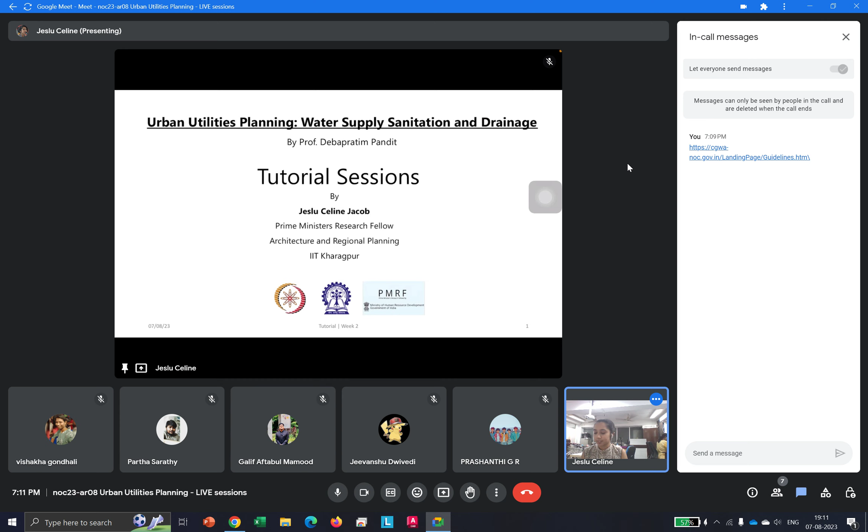So this week we will look into the topics which we discussed. We looked at water demand prediction and management, where we saw how we can predict water demand. Then in the next lecture we saw the types of water demand - what it's being used for, like fire demand, drinking, domestic water supply. So for all these elements we saw the different types of water demand.

Then in the lecture after that, we saw what causes fluctuations in water demand - the spatial and temporal factors which cause these fluctuations.

And in the later lecture we saw the role of government - how water is supplied, who monitors it, what are the state responsibilities, what are the center responsibilities, and are there any local bodies which regulate water. So all these roles of government we saw.

And finally in the last one we looked into the costs - is there a fixed cost, indirect cost, direct cost, maintenance cost. Then we also saw how we set tariffs - is it a flat tariff, a block tariff, or a volumetric tariff. So all these aspects we saw in our last lecture.

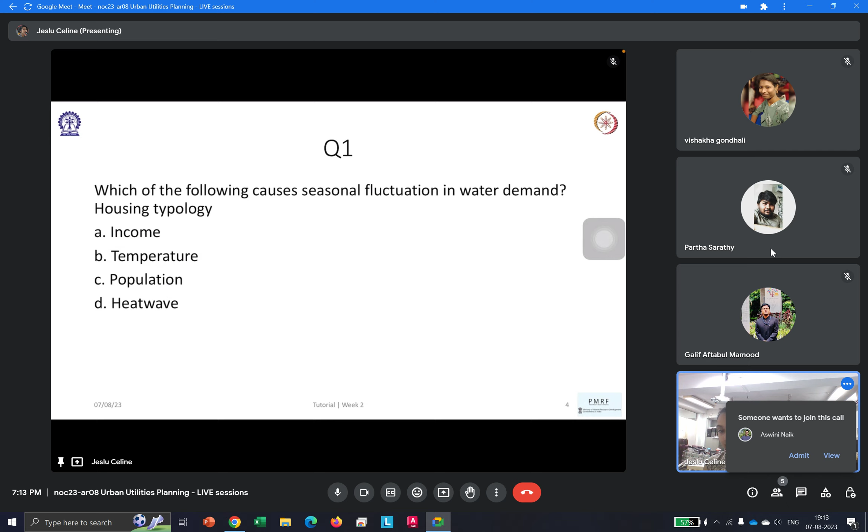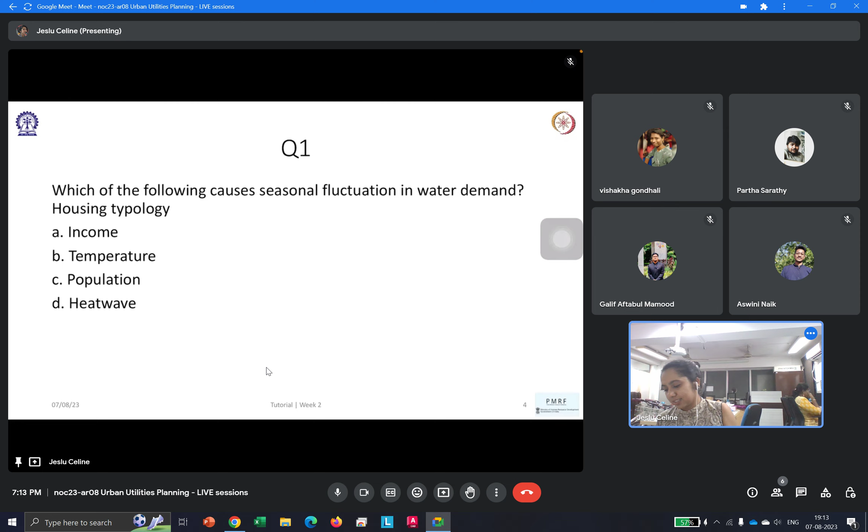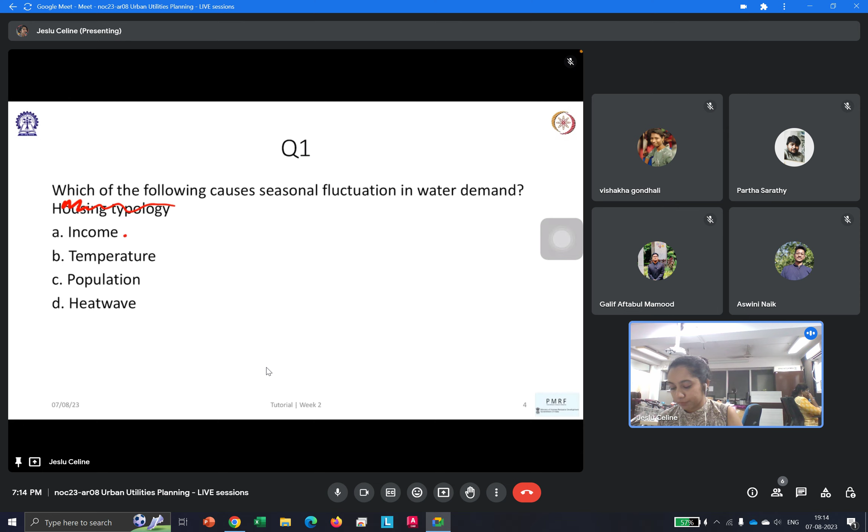So the first question is, which of the following causes seasonal fluctuation in water demand? I think we can just omit the first one, the housing typology one - that was supposed to be an option, but let's omit that, I think I made a mistake. So the options are income, temperature, population, and heat wave.

We are talking about seasonal fluctuation. So firstly, why do you think there are fluctuations in water demand? Seasonal fluctuation is one reason, yes. What are the other fluctuations that can be there? It could be due to the water usage behavior of persons, and there could be high temperature heat waves. Right, so there are many factors, like behavioral factors.

Seasonal comes under environment factors because of variations in environment. Then it can also be based on within a day itself - like you can have different usage based on peak time, needing water for a certain period, so there can be fluctuations in peak time, again linked to the behavior or activity of the person. Then also based on population - if there's suddenly a population growth or spatial variation in the region where water is being used, there can be fluctuation in demand. Even household type - different levels of housing, like if it's an affluent society you might use more water, whereas if people cannot afford a lot of water they may use less, based on the economic value of the place. So there are so many factors causing fluctuations in water demand.

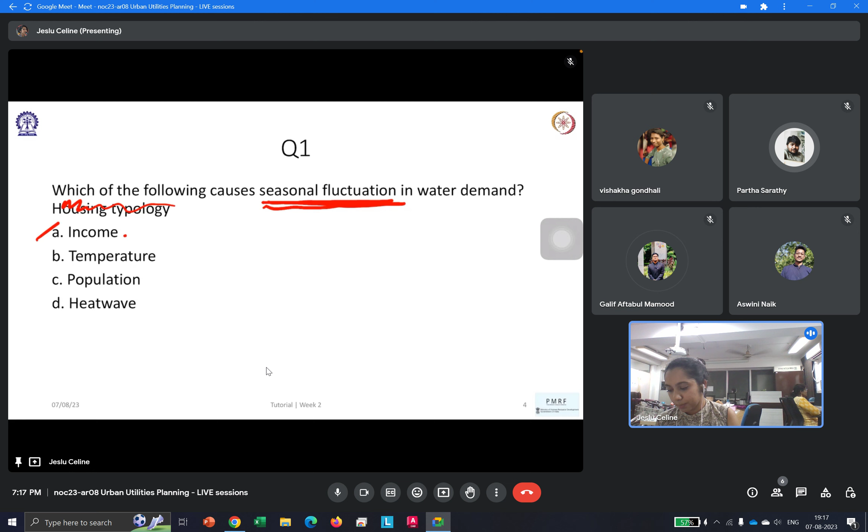So let's go back to the options and see which of these is a temporal variation. So income - is it a temporal variation or a spatial variation? Spatial, yeah, it is spatial. Income is a spatial variation, but with time also, the income of the family can change, so it can be included in both. If you can see the slide, it is included under temporal variation because over the years, the income of the family can also change.

One sec, somebody has joined. Yeah, because of this, the water usage behavior may also change. But when we're talking about seasonal fluctuation, income will not be part of it because with season, we can't say that every year at this particular season, the income's going to change. It's not going to change, so income is not the answer here.

Temperature - will that change with season? It's not changing... yeah, it changes with season and it causes seasonal variation. So the question mainly asks us what causes seasonal variation. So yes, temperature causes seasonal fluctuation.

And population - will it cause seasonal fluctuation? No, population will not. Population again is a spatial factor, and it cannot change with seasons. The population is not going to change, so that's not the answer.

And the last one, heat wave - does it cause a seasonal fluctuation? Yes... okay, anybody feels it doesn't cause a seasonal fluctuation? It lasts for maybe 2-3 days, 1 week, so it causes immediate fluctuation, I think. Correct, exactly, so we cannot claim that heat wave causes a seasonal variation.

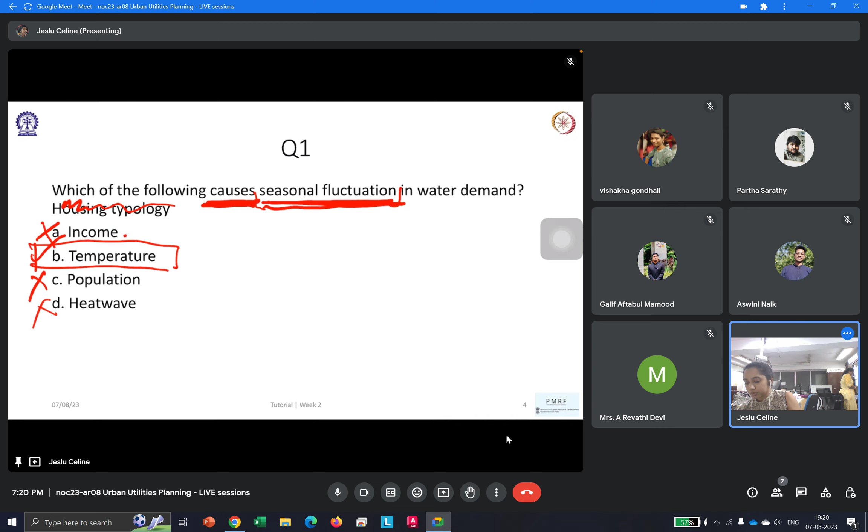So yeah, this is a tricky part. It might look like heat wave can cause seasonal fluctuation, but it doesn't, because we are talking about the main definition of something which recurs every year. So coming back, heat wave cannot. The answer is temperature - temperature causes seasonal fluctuation in water demand. So, any doubts in this question?

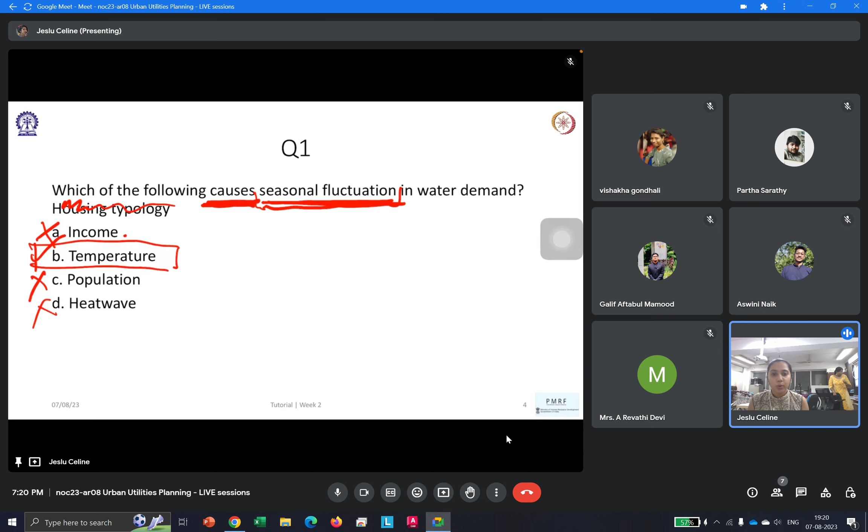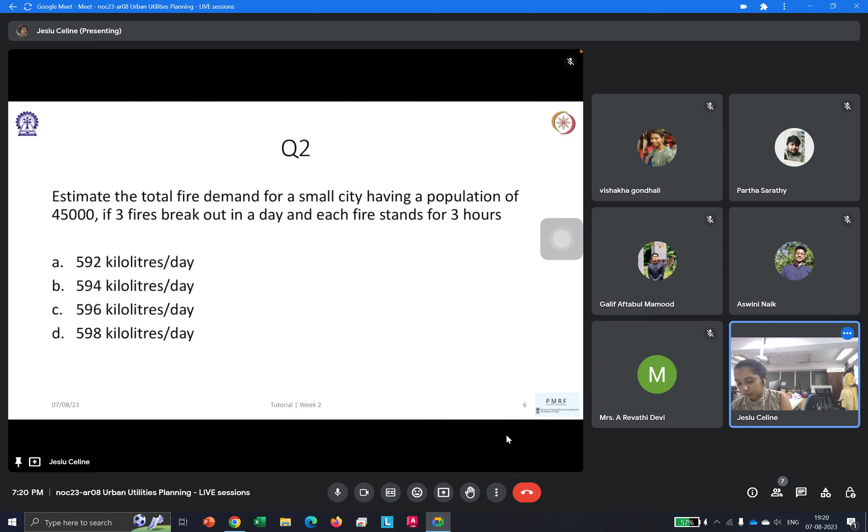Okay, very good, so let's proceed to the next question - this is a numerical. I would suggest all of you take your calculators and we'll work it out together. The question asks: estimate the total fire demand for a small city having a population of 45,000, if three fires break out in a day and each fire lasts for 3 hours. So we've been asked to find the total fire demand - this is what we need to find.

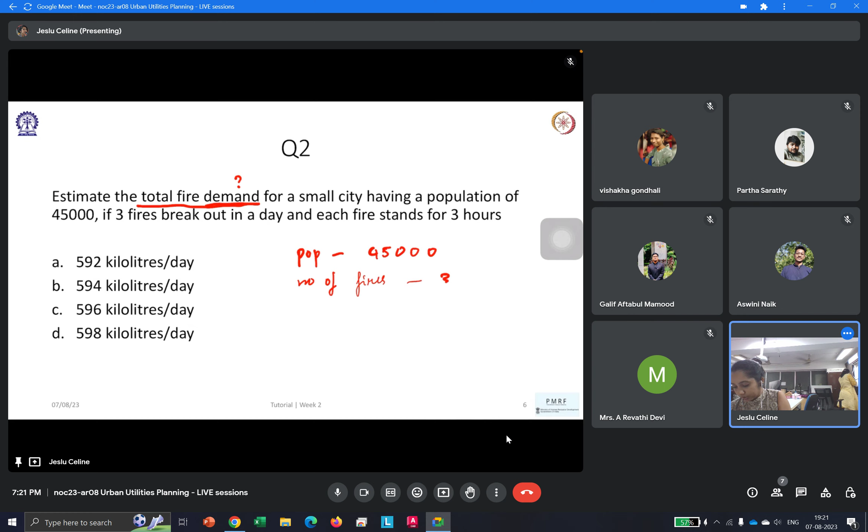And we know - I'm just writing down whatever we know. So we know the population is 45,000, and we know that the number of fires is three, breaking out in one day, and the duration of each fire is also known - that's the information given to us.

So now, how do we find fire demand? I'm sure all of you have gone through the video lectures. So we learned three methods of estimating fire demand. Can somebody give out any of the methods which you remember?

Okay, so what is the significance of population? Based on the population, the number of people residing in a place, the formula we use to calculate the fire demand also varies.

We have learned three methods. The first method is that if the population is less than 50,000, we use this where Q equals the number of fires into the discharge in minutes into the duration, divided by the total population. This gives us the water demand in liters per capita per day.

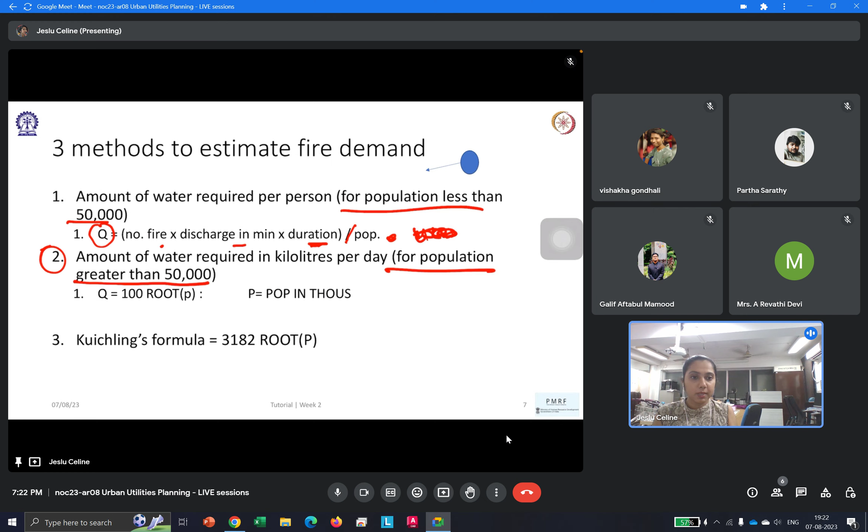The second one is that if the population is more than 50,000, we directly go by this formula because the quantity is large. We can estimate it since it's for a larger group, and more diversity is allowed. So we use a blanket formula where Q equals 100 root P, where P is the population in thousands. The last one is Kuichling's formula, where we use 3182 root P. These are the three methods we discussed in lectures to estimate fire demand.

So over here, which method would be suitable? Method one is suitable, yes. Why? Because the population is less than... Population is 45,000, which is less than 50,000.

Now if it equals 50,000 also, we can go by the first one. In fact, if we go by the first one, it'll always be correct. But to reduce complexity, since here we only need the population and not the discharge or number of fires or duration, we use the second formula when we have limited information. So we'll go by the first formula.

So let's see if we are writing the first formula. Let's do this together. Q will be equal to the number of fires into the discharge rate. The discharge is in minutes, and we multiply it by the time in minutes, which is the duration. So duration is again in minutes, and this whole thing, if we want to find it per person, we divide by the total population.

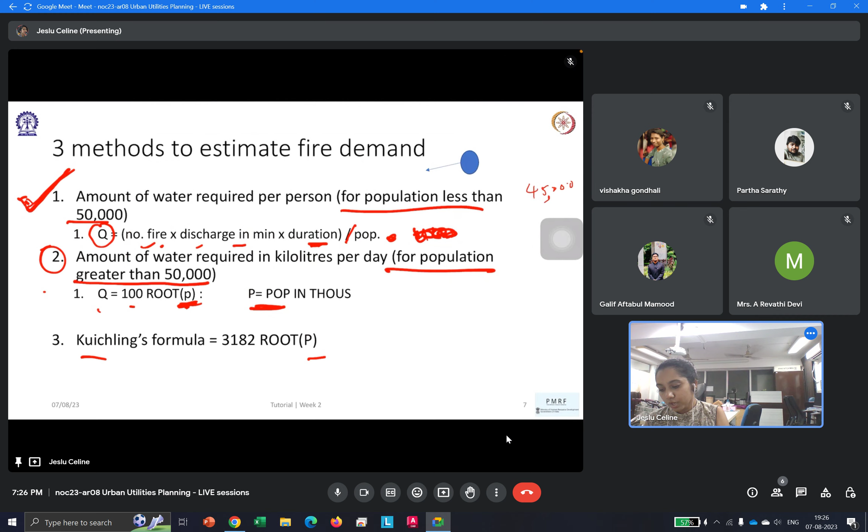And divided by the total population of 4,500. I'm not going to solve this right now, let this be. So now if you look at the options, this one gives us per capita demand - what is the fire demand per person. But in the question it's just given as kiloliters per day, which means we don't have to find it per person. So whatever value we get, we eventually need to convert it to kiloliters per day.

This is what we need to convert it to, or let's say liters per day. This is going to give us LPCD - liters per capita per day. This is the unit we are going to get from this. So to convert this, if we are removing the per capita, we need to multiply by the population. So it'll eventually be 3 into 1,100 into 3 into 60 divided by 4,500 into 4,500. This will get cancelled out. So now we can solve this - how much does this work out to?

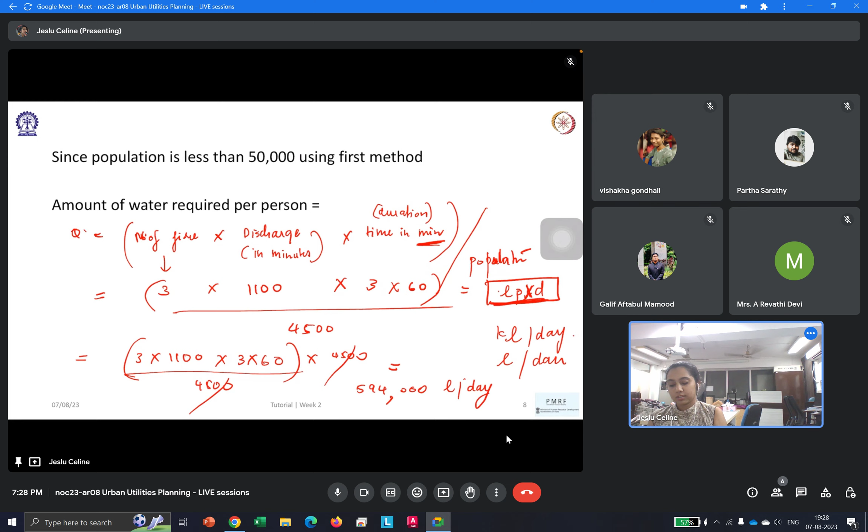How much does that work out to? 5,94,000 - yeah, that will be 594,000 liters per day. So the question is in kiloliters per day, so it will be 594. That's there in our option B if we look - yeah, it's 594 kiloliters per day. That's the answer. Any doubts in this question?

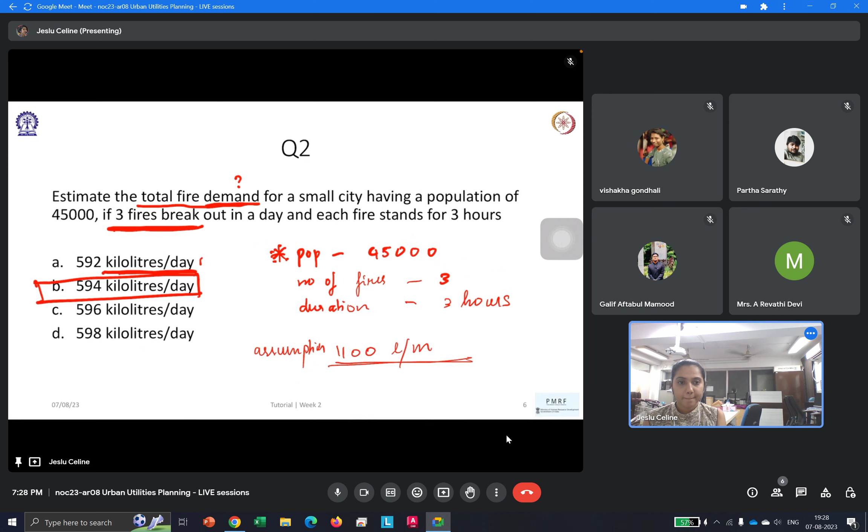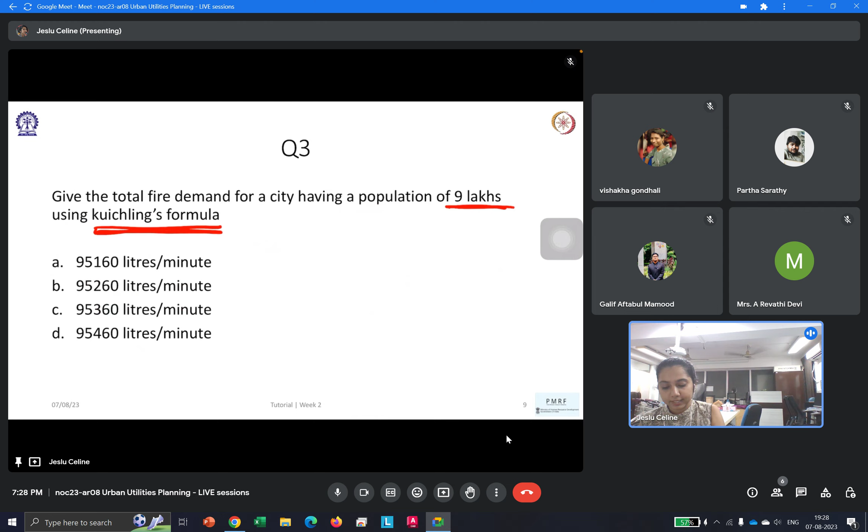Okay, so let's proceed to the next question. This is also a numerical, a very simple numerical. It says: give the total fire demand for a city having a population of 9 lakhs using Kuichling's formula. They've mentioned use Kuichling's formula, so it's a direct formula application. The population is given to be 9 lakhs, which is 9 into 10 raised to 5.

Now what was Kuichling's formula? Q is equal to 3182 root P. So if I write it as 3182 root of 9 into 10 raised to 5, is this correct? Is that the right method?

Okay, one factor we need to consider here - yes, somebody was saying something. Population, we have to check whether it was in thousands or lakhs. Correct, yeah, you're absolutely right, very good. So if you have to use Kuichling's formula, the population should be in thousands - that is the only requirement. Like the previous formula where we said time should be in minutes, here the population should be in thousands. These are all empirical formulas, right? So if the unit changes, or if the factor we're taking changes, then we'll get a wrong answer.

So it should be in thousands. Here it's given in lakhs, so now we have converted it, but for every 1,000 population we need to divide it by 10 raised to 3 in order to make the population into thousands. And then if we apply, we will get the correct answer. So this will be - yeah, this and this will cancel, it should be 900. Let me just put in 900. So what does this work out to?

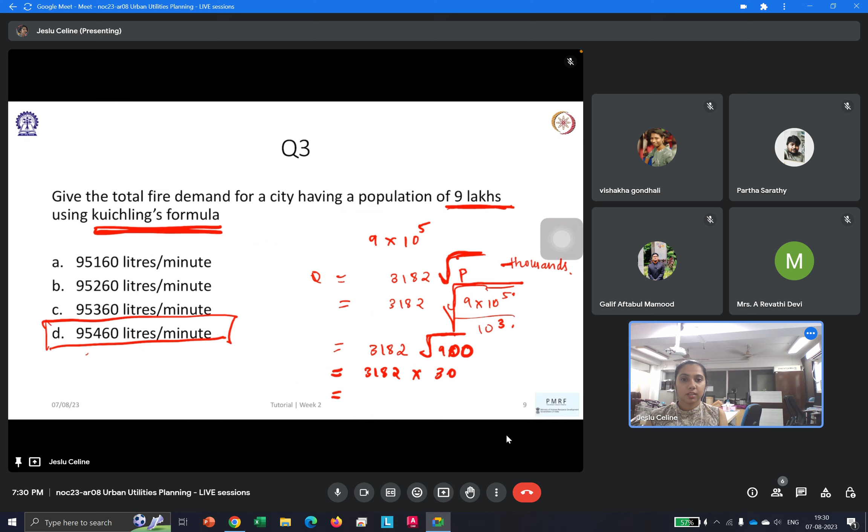95460, yeah, so that is there as option D, right? Yeah, 95460 liters per minute. Okay, any doubts in this question, anybody? Yes, let's proceed - so yeah, that was that.

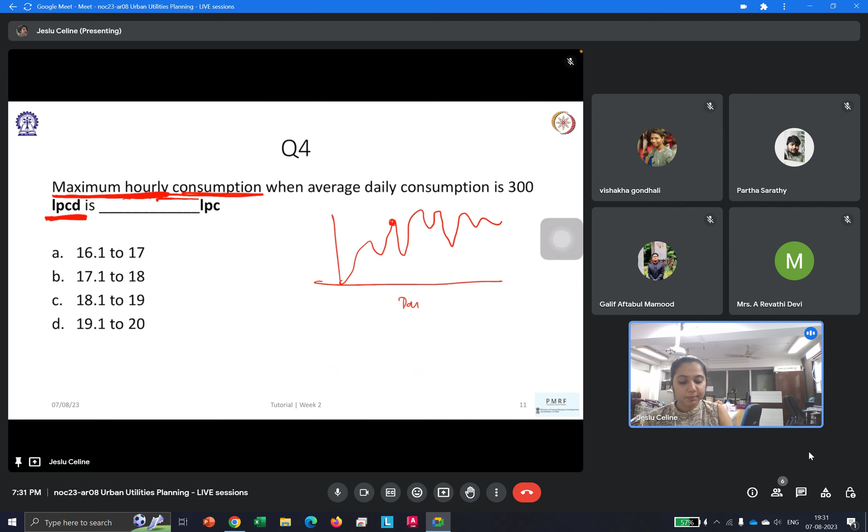So we have learned certain things - before we go into that, why do you think there is a maximum hourly consumption, or why do you think for every hour there is a variation or fluctuation? We just discussed that - there can be several factors leading to it. It can be a habitual factor, climatic factor, there can be seasonal variations. So based on that, if you take a time within a day itself, in an hour there can be certain peaks and certain lows. For instance, at morning 8 a.m. to 9 a.m. there can be a peak because people are going out or getting ready to go out, and then again in the evening it drops.

In the evening there's again a peak because people are coming back and using water in the evening time. Based on this, we see that for every hour there can be a variation, and we've derived certain general factors which we multiply with the average consumption to find the peak values. So does somebody remember, if you want to convert the average annual consumption into maximum daily consumption, what's the factor we use? It's how many times - so maximum daily consumption is how many times the average annual consumption?

2.7 or 1.8? Okay, you're partially right, so let's go into that - it's good to remember this. Maximum daily consumption is around 1.8 times, or 180 percent of the average annual consumption. This is something given in LPCD, which will come into the maximum daily as 180 percent of the average annual consumption. And the maximum hourly consumption, which is our LPC, is around 1.5 times, or 150 percent of the average daily consumption.

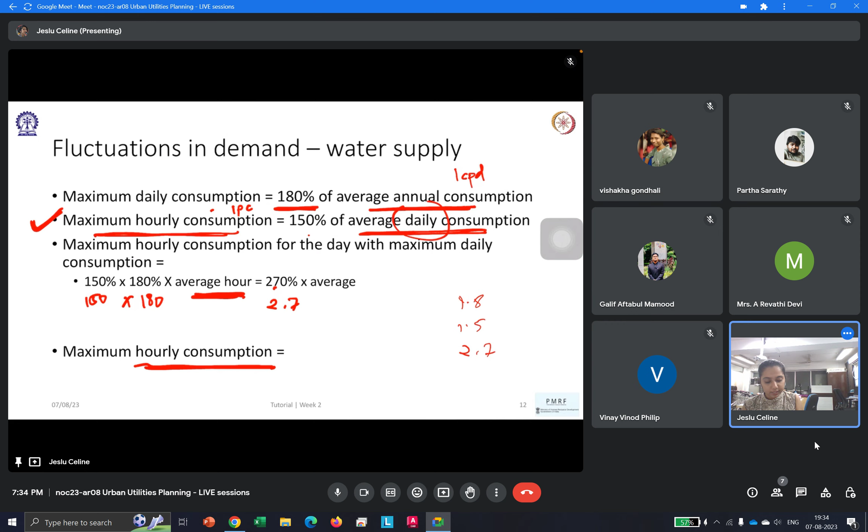So here the question asks what is the maximum hourly consumption, which means we are going with the maximum hourly consumption given the average daily consumption. Let's see what is given - yeah, we are directly given the average daily consumption, so it's a direct formula application. We can say the maximum hourly consumption would be around 150 percent - one thing we need to look into is that the average daily consumption is given in liters per capita per day.

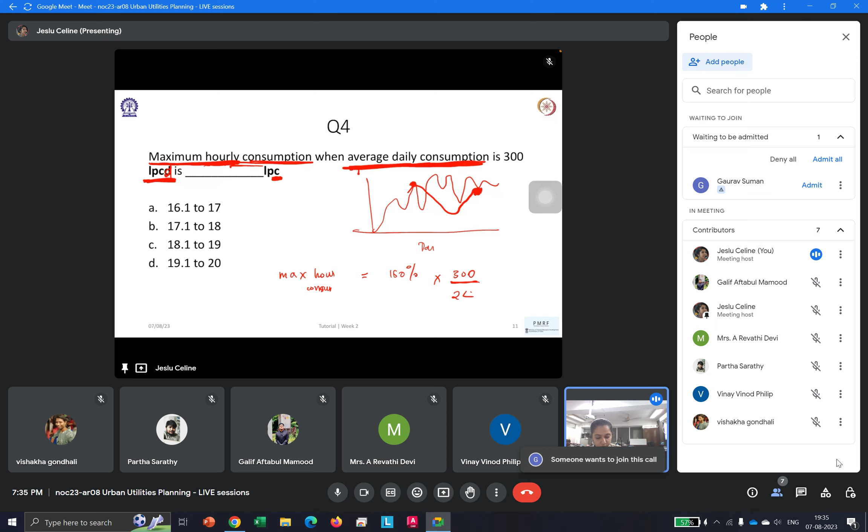So liters per capita per day is given, and here we need only maximum hourly, which is per capita, so we divide this by 24. This is something we might forget to do. Whatever we've got, we have to divide it because there are 24 hours. Right, so you have to divide it by 24. Let's do this calculation - this will be 1.5 into 300 by 24. How much does that work out to?

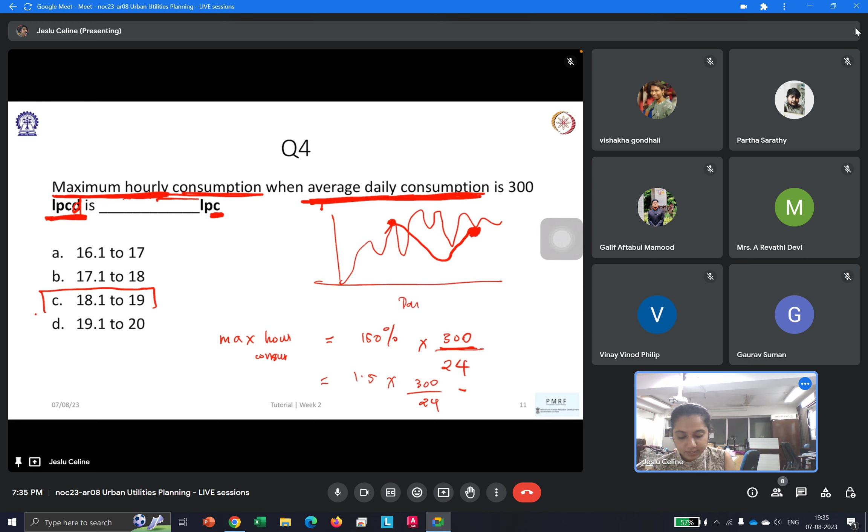How much does that work out to? It is 18.75, marks option C. Correct, 18.75. So here it's been given in a range, 18.1 to 19, so option C will be the correct answer. Any doubts in this question? Anybody?

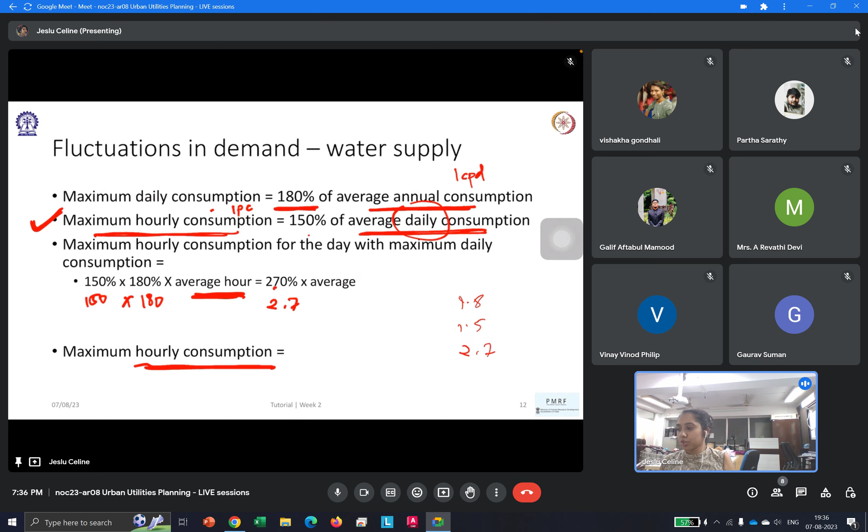Okay, great, so let's proceed to the next question. This is a continuation of the previous question - by continuation I mean it's very similar to the previous question, so the theory will be similar. The maximum hourly consumption of the day with maximum daily consumption, when average daily consumption is 200 LPCD, is dash LPC.

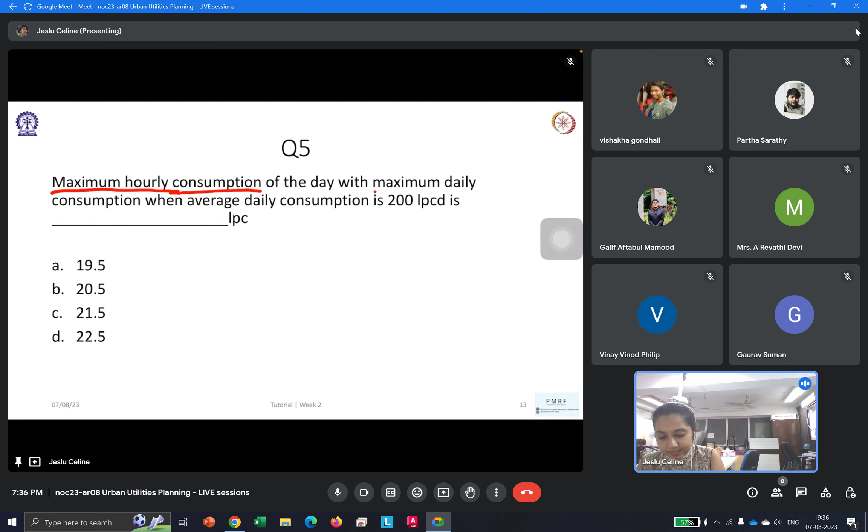I would suggest one of you tell me how we go about this question, since we've already discussed the theory, so it should be easy. Which formula would we use? What factor - do we use 1.8, 1.5, or 2.7? So what we've got, we have to find the maximum hourly consumption, and we have the maximum day. We have to find the maximum hourly consumption of the day with the maximum daily consumption - so it's the maximum hour of the maximum day when the average daily consumption is given. So what's the factor that we use?

2.7, correct, 2.7. Just to explain again - we use 1.8 to get the maximum daily consumption from the average consumption, and again we have to divide it by 24 because it's given for an entire day. To get the hourly peak, we multiply it again with 1.5, so this works out to 2.7. So it's 2.7 into 200 by 24. How much does that work out to?

22.5, very good. That is option D, 22.5. So any doubts in this question? No doubts. Very good, so we can proceed.

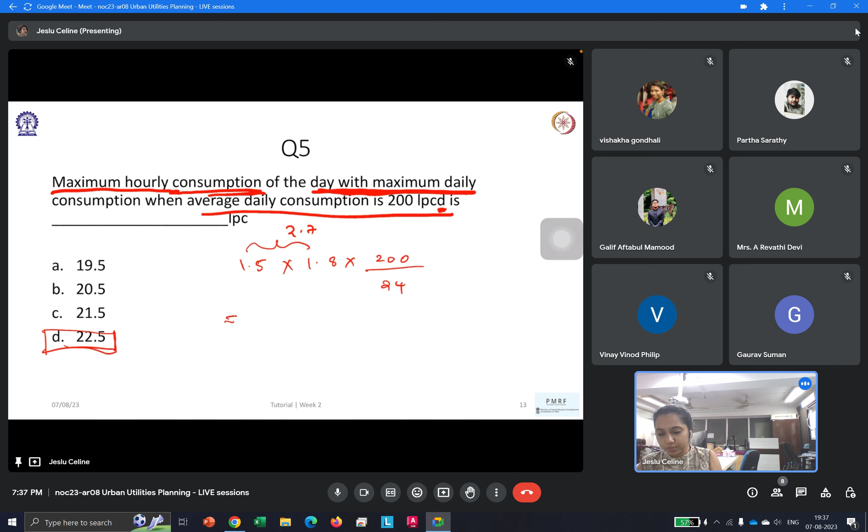That was a fairly simple question. Now we're going to question 6, which is again not very difficult. Identify the false statement concerning water supply. Four options are given. A: 24-hour supply decreases wastage of water due to leakage. B: there is constant pressure in the distribution system in 24-hour supply. C: maintenance requirement for joints and meters is comparatively more for 24-hour supply than intermittent supply. D: metering reduces water pressure drop.

This is regarding water supply, mainly talking about 24-hour supply versus intermittent supply. Let's start from the last option. Option D - is that right or wrong? Does metering reduce the water pressure drop? Any idea?

I think it is false. You think metering does not reduce water pressure drop, you feel it should be constant - metering does not affect the pressure drop, is what you're saying. Yes. Okay, anybody with a difference of opinion? Revathi, do you want to add something? No, no, it's okay.

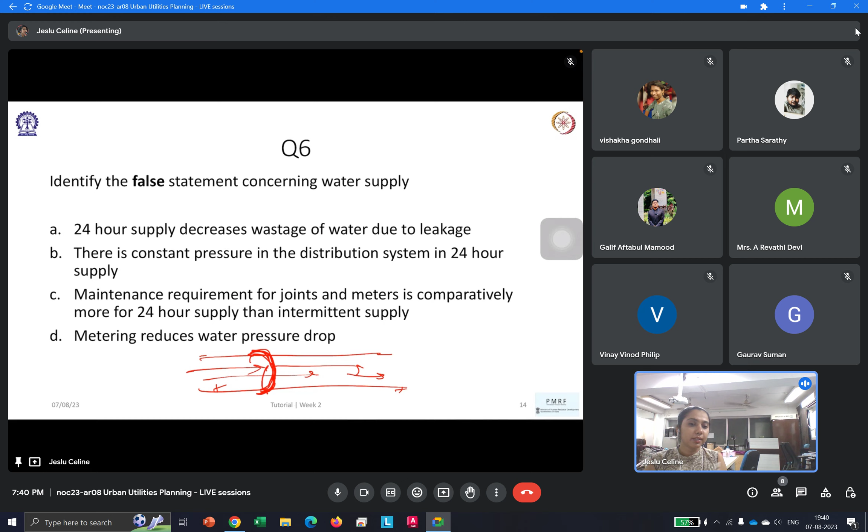I think this part, maybe in the lecture, we've not discussed in detail how metering affects water pressure. When there's 24-hour or continuous supply, there's continuous water flowing through, so there's constant pressure. Now what does metering do? We're introducing another element onto the pipeline - a meter. Because of this external element, there is an alteration in pressure drop. So when there's metering, there is a pressure drop - metering reduces water pressure drop. So that's actually a right statement. Maybe this we have not discussed in detail in the lecture, so that's why confusion is there. So that answer is actually right.

Now option C: maintenance required for joints and meters is comparatively more for a 24-hour supply than an intermittent supply. Is that right? Yeah, it is right, ma'am. Why is the statement right? Why do we need more maintenance? Because to ensure water is always there, we have to maintain it properly so that there is no leakage, no wastage. Correct, absolutely right. Maintenance is more, you need to maintain more when there's a 24-hour water supply.

Now let's go back to option B: there is constant pressure in the distribution system in 24-hour supply. Is that right? Correct, yes, because that's what we discussed - since there's always water flowing, there's constant pressure. And option A: 24-hour supply decreases wastage of water due to leakage - is that right? False, it's false. If there is a small leakage, then with 24-hour supply, water will just keep going, whereas with intermittent supply, only for that hour when water is pumped will there be leakage. So the false statement here is A, 24-hour water supply decreases wastage of water due to leakage.

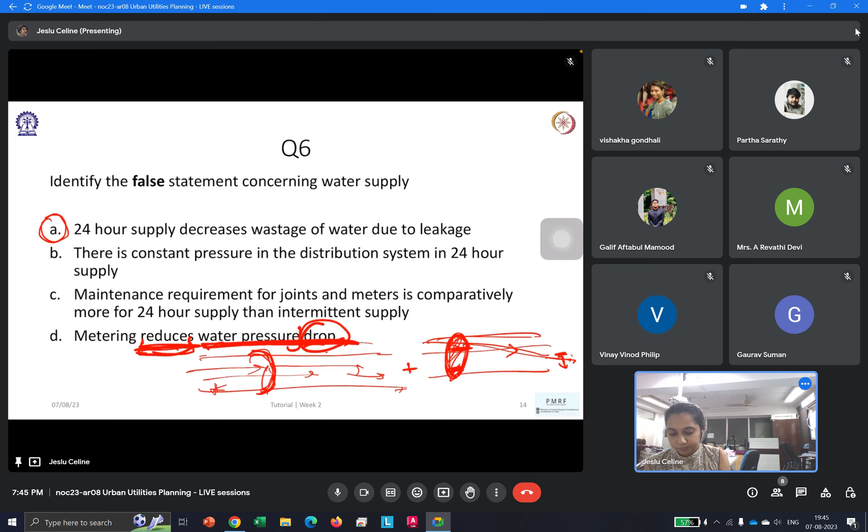So first we're talking about coincident draft. How do we calculate coincident draft? There are two methods. Coincident draft, or the total draft, the first one is that we take the sum of the maximum daily demand plus fire demand.

This is the first one, or we can go for the maximum hourly demand of the maximum day, using the 2.7 factor which we used for the maximum day. So these are the two methods, and we take the maximum of both, whichever is maximum: either the maximum daily demand plus the fire demand, or the maximum hourly demand for the maximum day.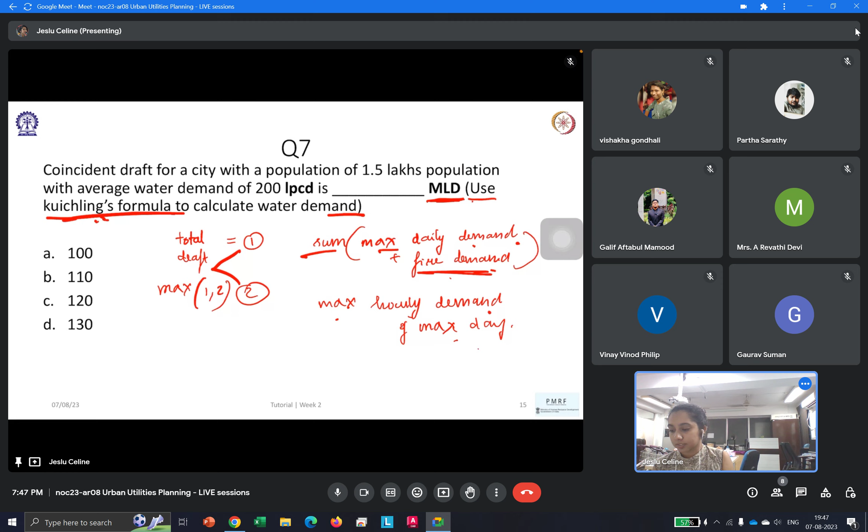So we will be using Kuichling's formula when calculating the fire demand. We would need it, so let's calculate both and see which one we need to take. In the first one, we need to find the maximum daily demand. So how do we find the maximum daily demand?

What is the - again, let's go back. The question gives us the average water demand as 200 LPCD and the population as 1.5 lakhs. Let's write that here first: population is 1.5 lakhs and average demand is 200 LPCD. So this is what is given. So, what will be the maximum daily demand?

Maximum daily demand - can somebody say what will be the expression for that? We just discussed this: 2.7 times average demand - no wait, we are only looking at the maximum daily demand, not the maximum hourly demand of the maximum day. We're just looking at the maximum daily demand, so what is the factor for that? It's not 2.7.

1.8, correct. So for maximum daily demand, it's 1.8 into - again this is given in LPCD, liters per capita per day. The question is asking us to find it in million liters per day, which means we have to get rid of the per capita, so we have to multiply it with the population.

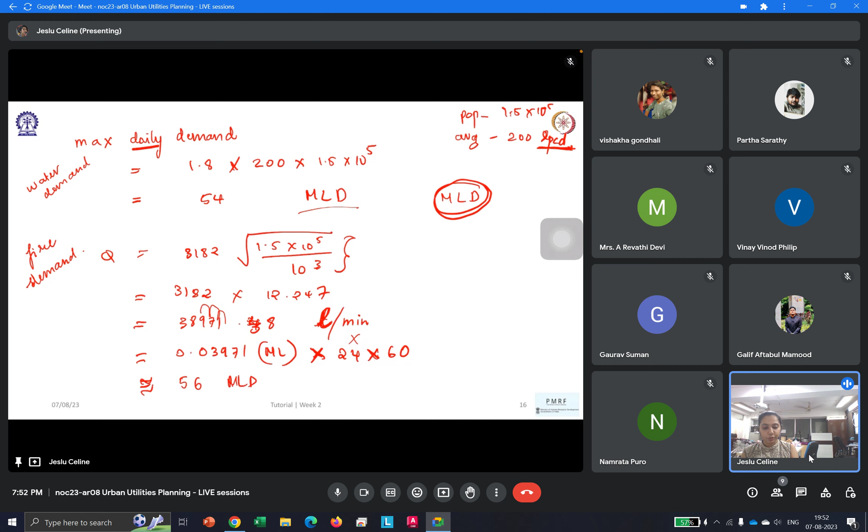So now let's go back to the formula. For the first formula, it should be the sum of maximum daily demand plus fire demand. So we are adding Q1 and Q2. Q1 plus Q2 is equal to 54 plus 56.

Right, so this is what we got from the first method. Now let's go to the second method, where we find the maximum hourly demand of the maximum day, like maximum daily demand. What's the factor for that? 1.8 into 1.5, 2.7. 2.7, correct. 2.7 into our 200 LPCD.

Now we have to convert it into the population. Because we want it in MLD, we are doing the same thing into 10 raised to 5. Now we also have to divide it by the number of hours, because this is for the maximum hour that we are looking forward to. So how much does this work out to?

Yeah, so one thing, sorry, we are doing this. This is the standard tendency that we have - we divide it by 24 in order to get it into the number of hours. But as we are saying we are looking at MLD per day, which means we did not do that. So eventually we'll again have to multiply it by 24. So let's not do that portion, because our unit is MLD.

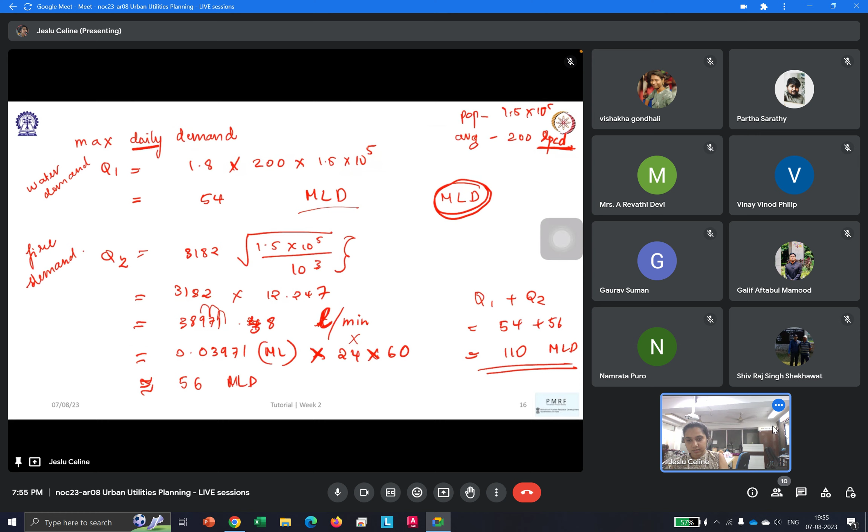Let's go back one sec. It's stuck. Yeah, so 110, option B, 110 is the answer. Any doubts in this question?

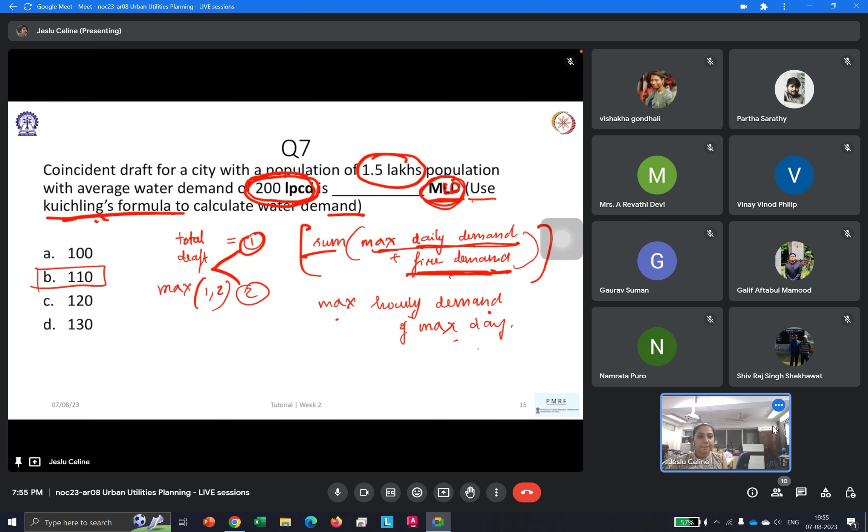Okay, so let's proceed further. Question 8: Water demand is mostly inelastic in terms of income, water price, household composition, or none of the above. Firstly, what do we mean by elasticity or inelasticity? Any observations on what you mean by inelasticity?

Doesn't vary with - that's the tendency of being flexible, yes, that's the normal definition. But as Galif said, it doesn't vary with. So in the aspect we're talking about here, we're talking about water demand being inelastic, which means...

Inelastic means, okay, so if we have a factor X contributing towards Y, and if Y is our water demand, now if X is changing, if X increases, and Y also changes, then it is elastic in terms of X, because whenever X is changing, Y is also changing. But even when X is changing, if Y does not change, then it is inelastic in terms of X. So that's what we want to find here.

If our water demand is Y, then for which of these factors is water demand or water consumption not changing? Let's go option by option.

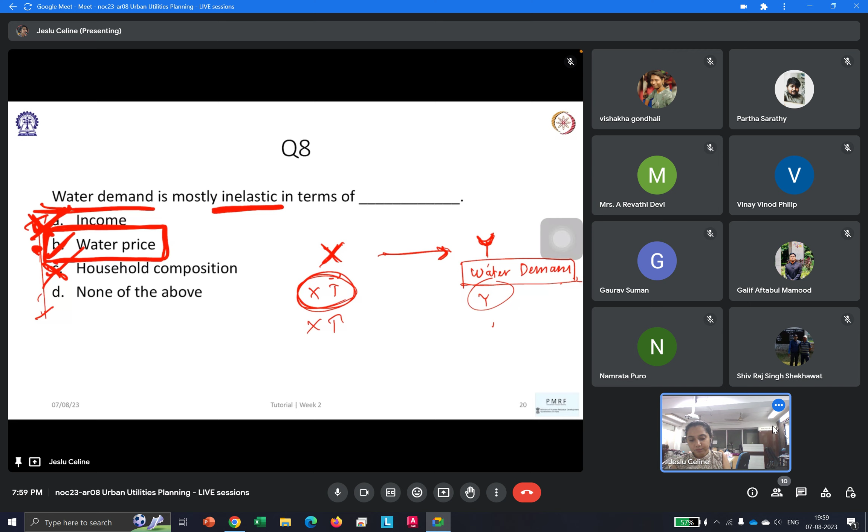Which of the following is not an example of macro scale interaction concerning water demand? Before we attempt this, let's look at what macro scale means, and what the other scale is that exists.

So what is it? Something which has an impact on a national level, yes. National level, or mainly at an environmental level - it's not very personal, but more for the community or the environment you're in, so at a larger scale.

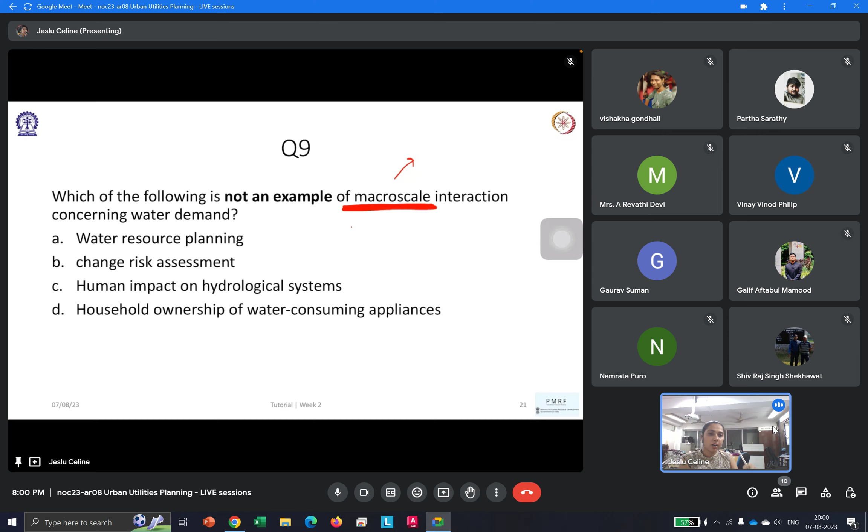So you have a macro scale, and along with that we also have a micro scale. Macro scale is at a larger regional, municipal, or community level, or as rightly said, at a national or global level - all that comes under macro scale. Then we have micro scale, which is at a very individual household or a very small level - by the name itself, it's a micro level.

So here we've been asked which of these is not an example of macro scale interaction. Let's look at the options. Water resource planning - is that macro or micro scale?

It is... a micro scale? Water resource planning, is it... macro. It's macro. Okay, why is it macro?

We can cite an example of, let's say, Ganga River. It passes through various states. And if one state is planning for some municipal project, water resource planning comes into play because every state has some share, some sort of share to which they are limited to use.

So just to pick out a few keywords from whatever you said. You said that every state has a responsibility, it goes through different states, there's a state government policy which is put. So all this shows there is an authority at a community, regional, municipal, or state level, with some responsibility or impact because of this planning. So all this resource planning, policies, or allocation comes under a macro scale because it doesn't consider only a single individual, but people or a population at large.

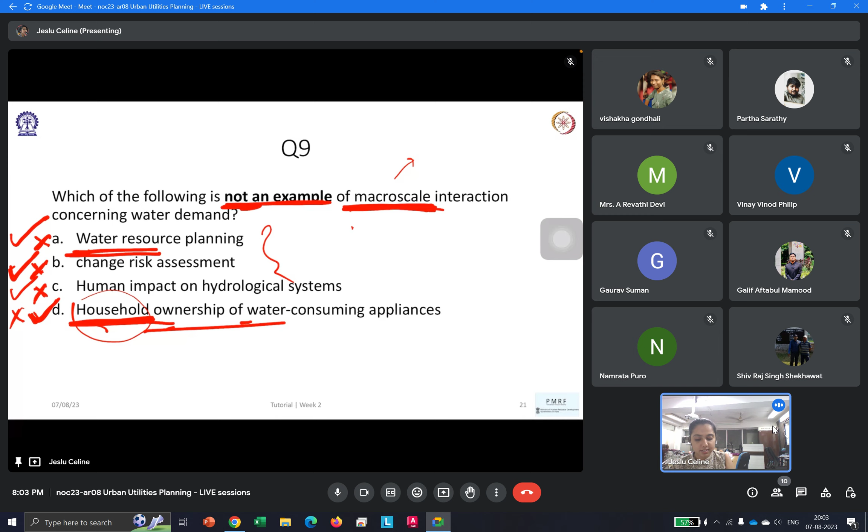So this is the correct answer, option D. Let's proceed on to the next question.

Question 10. According to IS 1172/1993, what is the minimum amount of water for economically weaker section of population considering supply through a stand post for communities with population up to 20,000? This is a direct IS application question.

Anybody have any guesses on what's the answer for this? 100. Okay, any more guesses? I can guess normally it's 60 LPCD. It's LPCD, it is 60. Okay, anybody else? Any other difference of opinion?

Okay, so let's look into the theory we learned for domestic water demand. So for communities with water supply through a stand post, as per IS 1172/1993, the minimum water supply should be 40 LPCD. Now, 100 is when the community has a population of up to 20,000... for a population greater than 20,000, up to 1 lakh, and with a full flushing system, it is 100 to 135 LPCD. Here the question specifically asks for a population of 20,000, so for 20,000 the minimum is 40.

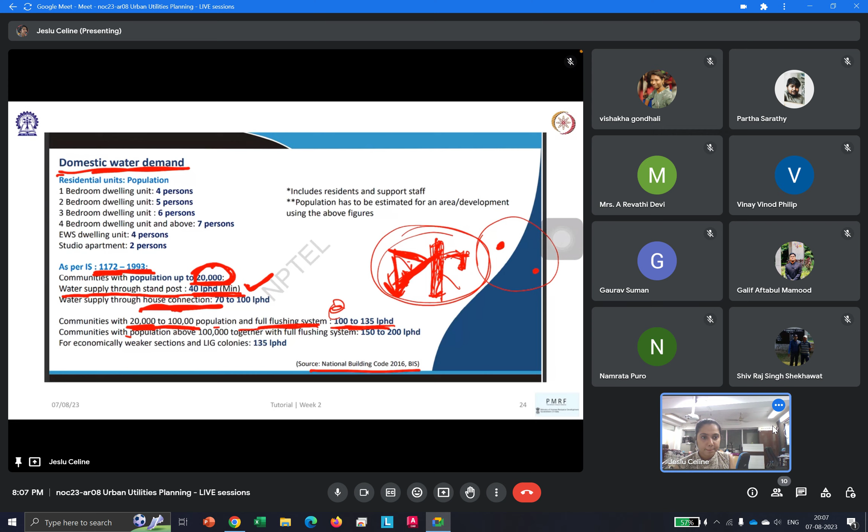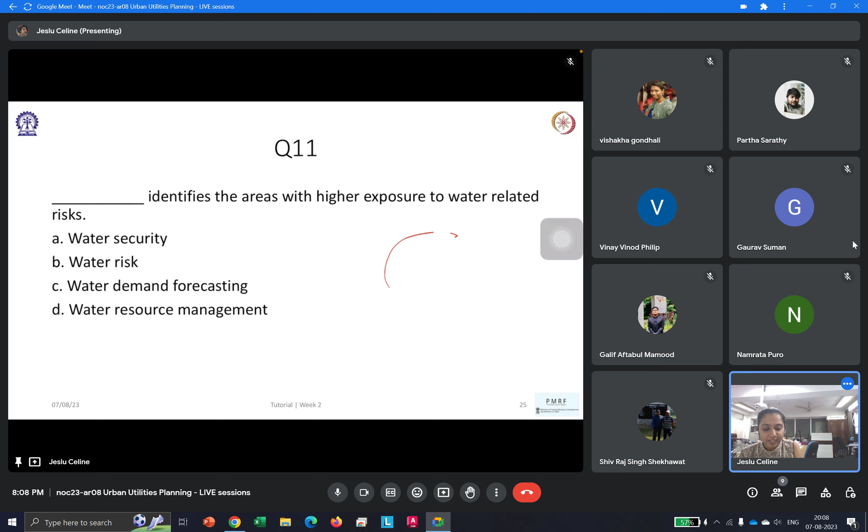I think it's a very straightforward question—what identified areas with higher exposure to water-related risks? From the question itself it's kind of clear. Will it be water security? Will water security identify areas with higher water risk? No, it's not water security. Water security mainly stands for conservation of water, so that we do not overuse it. Water risk, yes, is one possibility because we identify areas where there's higher exposure of risk. That's one. But let's look at the other options also.

Water demand forecasting talks about what will be the future demand so that we can plan our pumping systems and water supply systems accordingly. Water resource management is mainly used to allocate water resources between different states or regions. So the answer to this is water risk—it identifies the areas with higher exposure to water related risk. That's a very simple question.

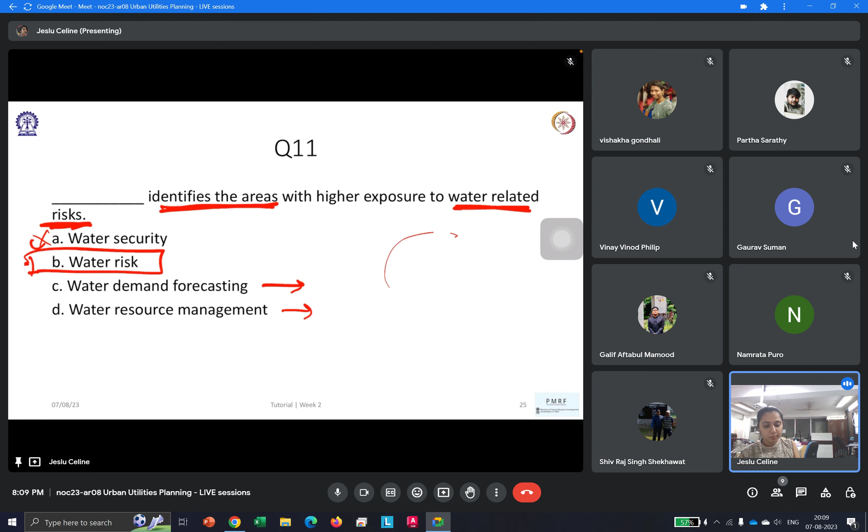Let's proceed to the next question. Which of the following factors contribute as an explanatory variable for predicting spatial variation in water demand? This is a continuation of the first question we learned—we saw there was spatial variation, and what was the parallel to spatial variation? There was...

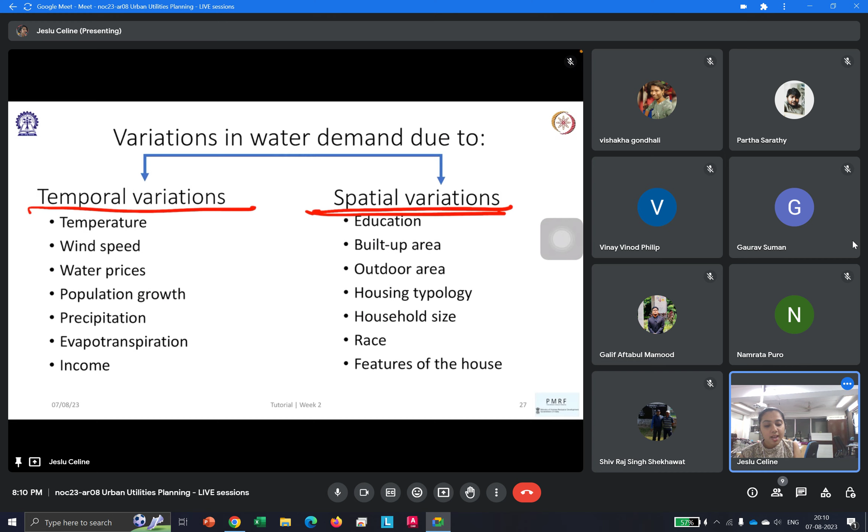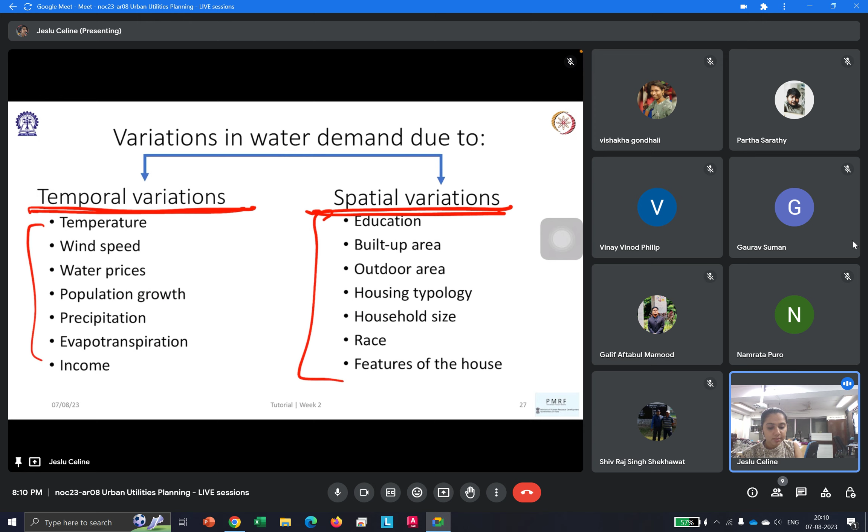Temporal variation. This is what we saw in the first question we discussed. There's always spatial variation and temporal variation. Spatial variation changes with respect to the spatial or geographical location, and temporal variation changes with respect to time. So the question mainly asks which of the factors contribute towards spatial variation—predicting the spatial variation. This is what is asked.

Let's look at temperature—is it a spatial factor or a temporal factor? It's a temporal factor, so this does not contribute as an explanatory factor for spatial water demand. Correct.

Now income—is it spatial or temporal? Again, temporal. Income is also temporal, so I'm putting it as T. Housing typology—spatial. Housing typology is spatial, correct. And built-up area—that is also spatial, because with time your built-up area is not going to change, unless people are moving to a different household, which is a totally different context, and that's again spatial because you're shifting or upgrading.

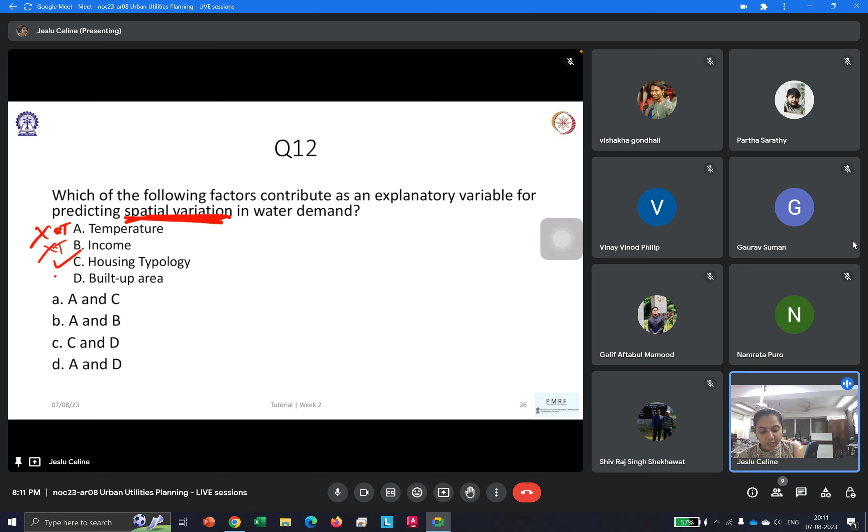But in general, housing typology or built-up area is a spatial factor, so the answer is C and D—these two factors contribute as explanatory variables for predicting spatial variations. Now let's go to the next question.

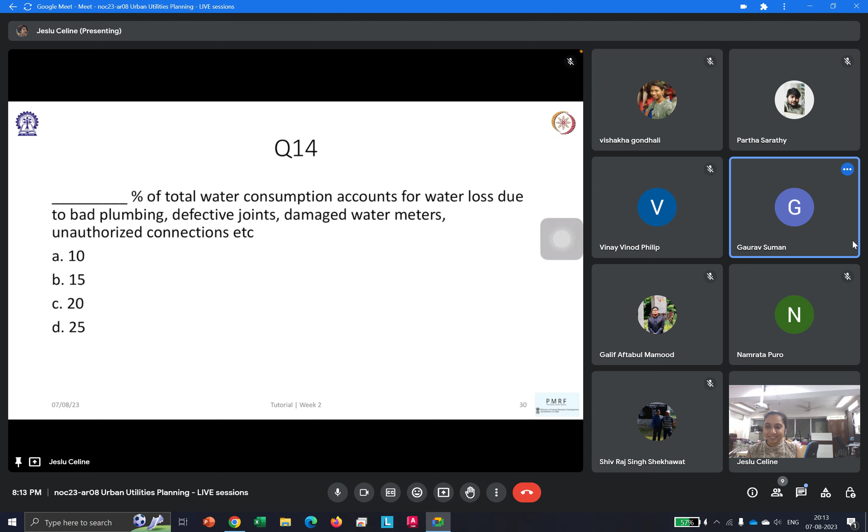Okay, let's go to the next question. What percentage of total water consumption accounts for water loss due to bad plumbing, defective joints, damaged water meters, unauthorized connections, etc.? Yes, 15%. We just saw that in the previous one. So going back here, 15 percentage of the total consumption is lost, from this particular source. So that's the answer.

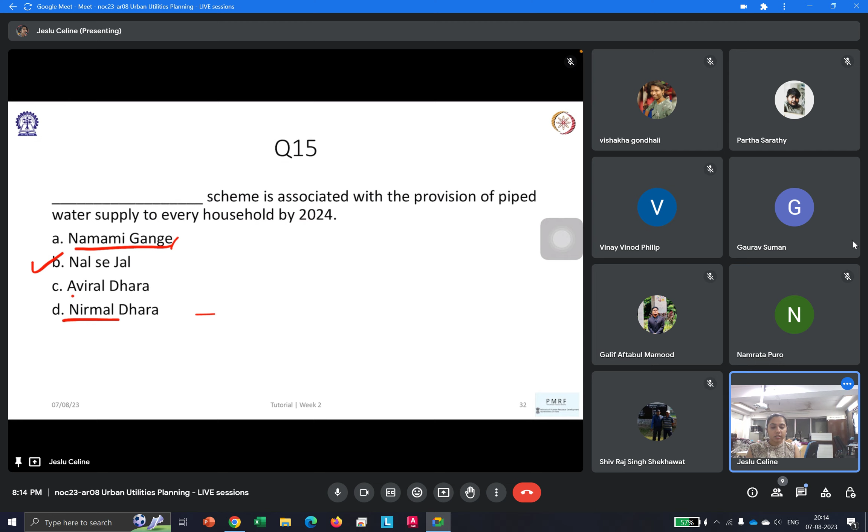Now what do Nirmal Dhara and Aviral Dhara do? What is that for? Nirmal Dhara, okay, that's mainly for rivers, for regeneration of rivers. Both of them are used to regenerate rivers. So the answer for this is Nal Se Jal.

Could you be more specific about which river? That I need to check, but in general it's mainly used for regeneration of rivers. Which rivers it's currently implemented in, I'll get back to you, I'm not really sure where it's being done. That'll be there in Google also. I can tell you by the end of the class also.

Let's go to question 16: which is the wrong statement concerning urban water supply? Water supply is a central subject. Center oversees the interstate distribution of water. Swachh Bharat mission is associated with urban waste management and sanitation. Jal Shakti Ministry aims to provide piped water supply to every house by 2024. So it's regarding urban water supply.

Let's go from the last option. Option D: Jal Shakti Ministry aims to provide pipe water supply to every household by 2024 — is that right? Yes, correct, we have discussed this. Now option C: Swachh Bharat mission is associated with urban waste management and sanitation — right, that's also correct.

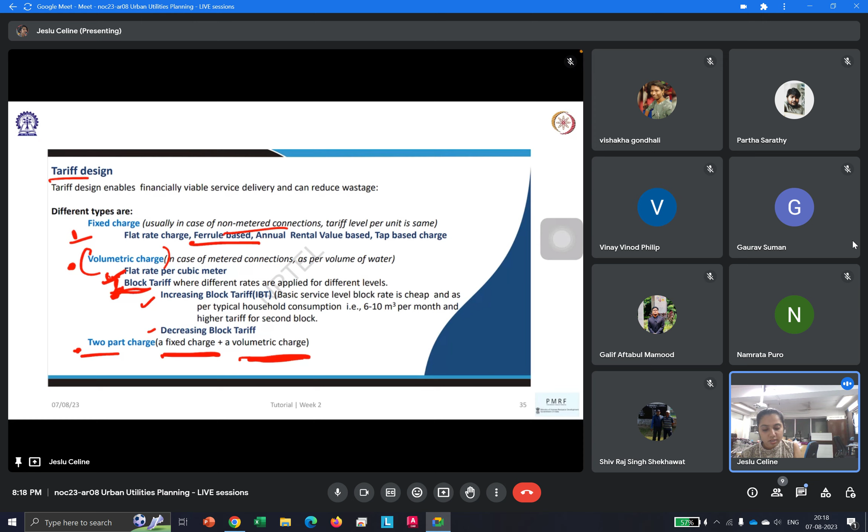Then of course you have the two-part charge, where you have a fixed charge as the base, and after reaching the base you go for a volumetric charge. So block tariff mainly comes under volumetric because it's based on volume — that's what was asked, block tariff is an example of volumetric charge. We also discussed fixed charges, two-part charges, and indirect cost.

There's direct cost and indirect cost in water supply system. So what constitutes the indirect cost? Any observations?

Yes. Indirect costs are...

So we learned about different costs. We have direct costs, which mainly include fixed and variable cost, where you have the initial capital investment, interest, life cycle capital costs, everything. Then there's variable cost that recurs, like power, bulk water supplies, everything. In addition, there's always an indirect cost also, which talks about administration charges, establishment charges, policy intervention charges - not very tangibly visible, but still part of the overall cost invested in our water supply system.

So when we are considering cost recovery, we also need to look into this indirect cost which will be incurred over time. Establishment charges, administration charges, all these will come under our indirect cost.

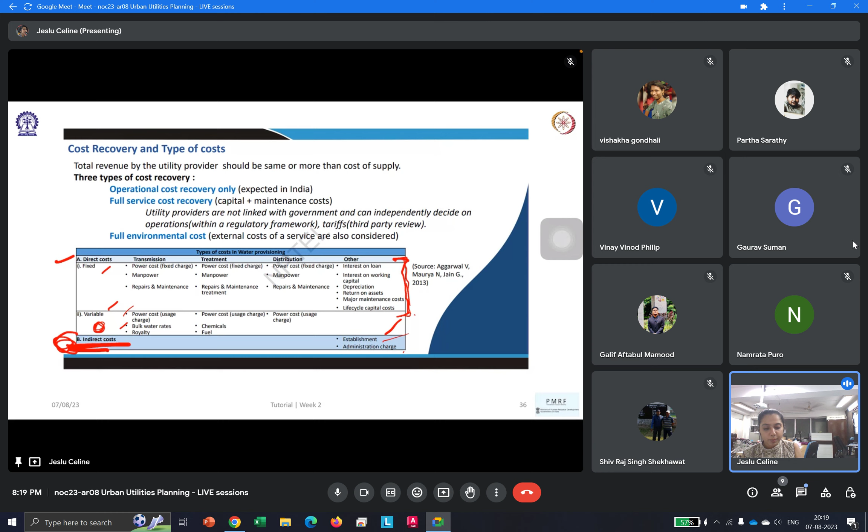Right, so we are proceeding to the last question. I think we went really fast today. This is the last question - it's a match the following. Let's go option by option. So manpower cost - what is the basis of defining manpower cost?

I guess bullet number three, based on number of employees. Yeah, manpower, because none of the other options talk about people. So it is bullet number three, based on the number of employees.

Correct. Bulk water rates. Anybody? Serial number one, cost to acquire water. Correct, because this is the only option which talks about the cost required to acquire water, and it's the definition of bulk water rates - cost to acquire water from source by urban local bodies from the state water bodies. That's the definition. Correct. Now bullet C, chemical or treatment cost - what will that depend on?

There is only one option which talks about water treatment - option two. It depends on the water which is treated, because based on the amount of impurities and quantity of water treated, the cost will vary. Repair and maintenance cost depends on the cost of major replacements, for example major and periodic maintenance - that works out to option A.

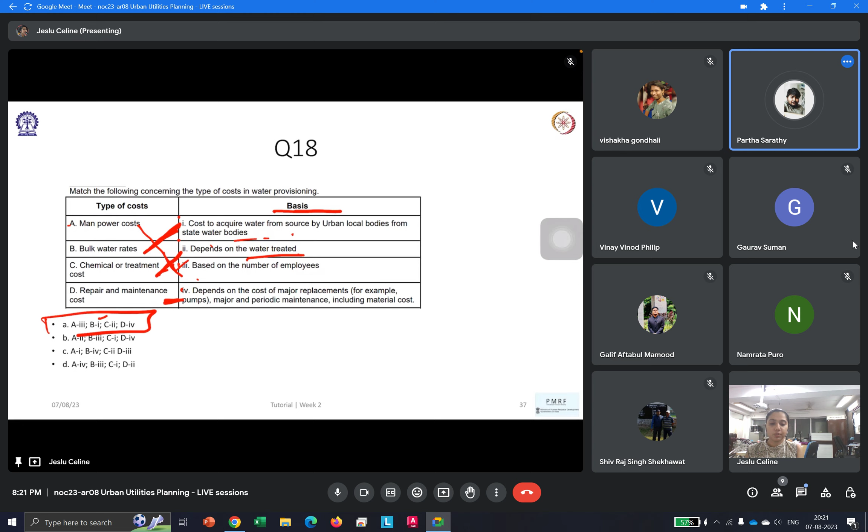3, A. 1, 2, option A. Right, so that's it. That's all the questions that I have. But we have time, so if you have any doubts, we can discuss those regarding this week two's lecture.

I guess somebody had asked a doubt about fire demand calculation last week, right? Is that sorted? I think he was asking about the assumption we took for that - 1,000. But I think in this question paper it's mentioned, or not, how much is to be taken. The assumption is not mentioned. I was under the impression it's mentioned. Oh okay, fine, then it would be clear right now. Sometimes textbooks will already give the value, like 1,000 liters per minute. So if it's given, we need not worry, but if it's not given, we usually take 1,000 liters per minute.